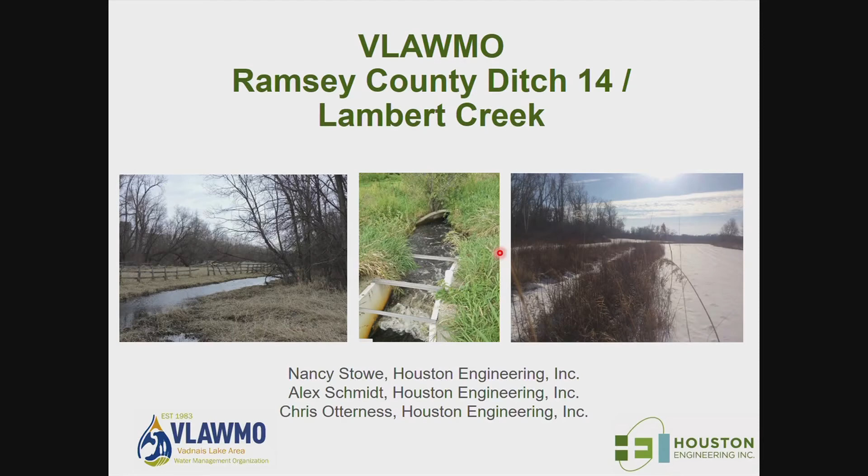We're here to present to you an overview of the methods and results of a project we've been working on with the staff of VLAWMO on Ramsey County Ditch 14 public drainage system, also known as Lambert Creek.

I'm Nancy Stowe. I'm a water resources engineer with Houston Engineering, and I served as project manager. Alex Schmidt, the tall one in white, is a project engineer. He did a lot of the heavy lifting on this project. And Chris Otterness, his role was an advisory role. He's also the district engineer for the Rice Creek Watershed District. So he kept us on the right track as far as the regulatory aspects of the public drainage system, and he'll briefly discuss that this evening.

So just a figure to get us oriented, showing where County Ditch 14 lies within the VLAWMO watershed, as well as its local subwatershed.

So what we're going to discuss this evening is we're going to provide you some information on the condition of County Ditch 14 with respect to its establishment, the regulatory environment, and its current condition. And then in the end, we're going to provide you with some management recommendations for the future.

So why is this important? County Ditch 14 was constructed over a century ago, and it was, of course, originally designed to serve agriculture. But as any aging system, it's very likely that its capacity has decreased due to sediment accumulation, trees falling, maybe channel banks falling in, reducing the capacity.

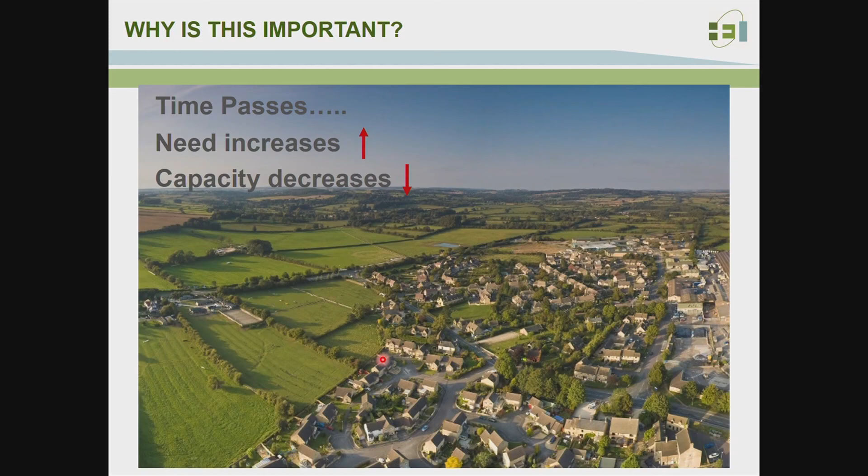So it was actually a really good idea to evaluate the capacity and the demands on the ditch - look at the current ditch depths as well as the capacity and peak discharges going through it nowadays, as well as the high water levels. And this information then will lead to identification of problems to solve.

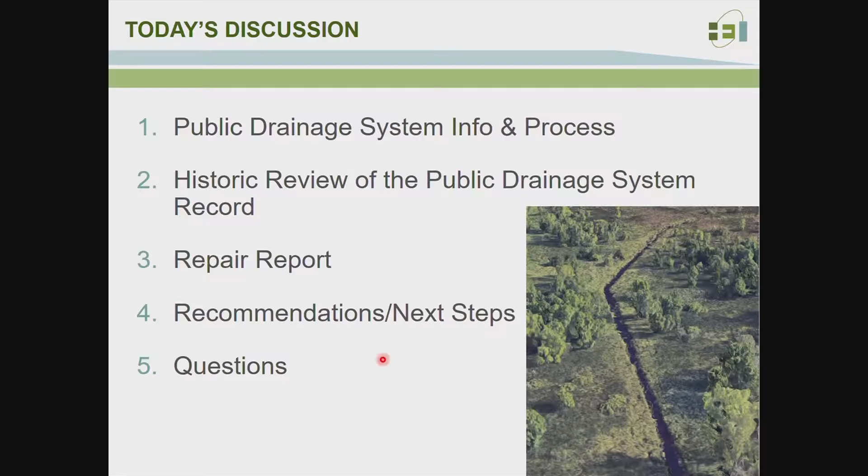So today's discussion, this is a brief outline. Chris is going to first come up and share some information on public drainage systems and processes. Alex will then share what he discovered through a historical review as well as results of survey data collected along with the staff of VLAWMO. And then we'll share the results presented in a repair report that we submitted to the district, or to VLAWMO, and provide some recommendations and next steps, finishing up with questions and discussion.

So right now I'm going to exchange places with Chris.

So I'm going to talk a little bit about what exactly a public drainage system is. And really when I'm talking about that, I'm talking about these agricultural systems. Most of them were constructed back at the turn of the 20th century. Some of them were even before that, late 19th century. A lot of the local drainage systems around Anoka and Ramsey counties were constructed back then.

But these are systems that are located all across the state. Most of them are still in existence, still being utilized for various different purposes. But the original purpose for these systems was to be able to drain agricultural lands.

And one side purpose for that, stated in numerous documents from 100 years ago, was the idea of actually doing this work to drain wetlands in order to decrease the mosquito population. That was one of these side reasons that they used them for back then.

Of course, these reasons for having the drainage systems can change over the years, but all these systems are subject to a Minnesota state statute called 103E. This statute has been in some form for over 100 years, and it's the mechanism they originally used to establish these drainage systems.

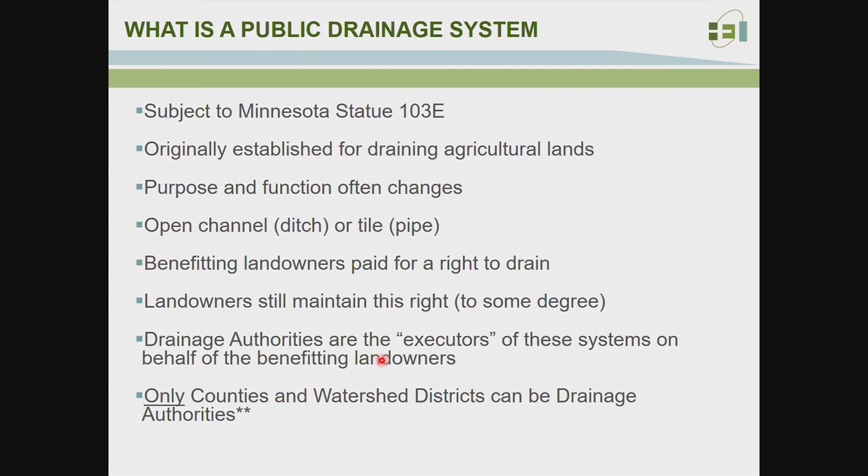But they still act as the original drainage authority does, as an executive of the system on behalf of the benefiting landowners. Those people who paid for it originally are the ones who receive the benefit, and the drainage authority is responsible for acting on their behalf and in their interest when wearing their drainage authority hat when making decisions regarding these systems.

So I'm talking a little bit about VLAWMO and their role in the system. Again, they were transferred authority of the county ditch back in 1986, so it's been a number of years now. There aren't many of these drainage systems that have been transferred to a water management organization like VLAWMO.

In fact, they might be one of the only ones in the state that I'm aware of that was transferred to this authority. It was transferred under state statute 103E, section 812, which says that after the transfer of a drainage system, to any sort of municipal Water Management Authority, the drainage system ceases to be subject to regulation under that chapter, meaning statute 103E. So the authority now is under a different state statute, 103B.

However, it's still a good practice, and in some cases a necessary practice, to follow the original state statute for public drainage systems. There's a few reasons for that. One, the nature of the system, even though it's providing a different purpose now, not agricultural drainage but more of a municipal outlet, it's still a ditch, meaning it's still going to function in a similar manner. It's going to have similar issues with regard to maintaining the system and being able to have water flow the way it needs to.

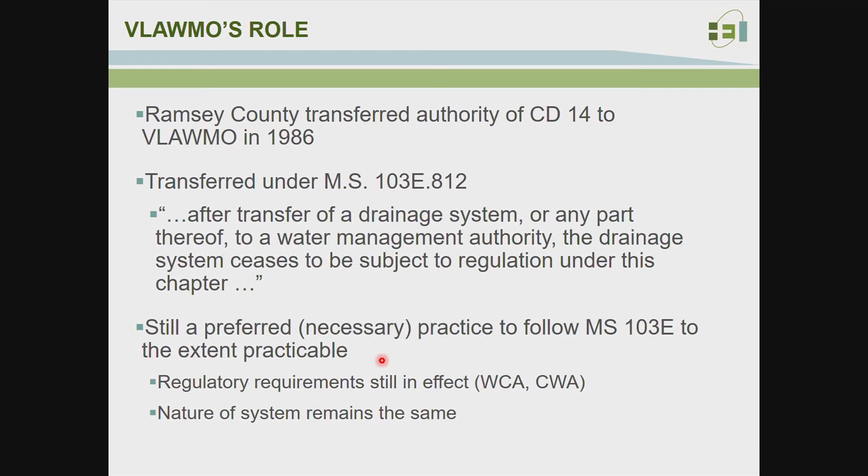So I'm going to talk a little bit now about why you even maintain the system. You have this old ditch that's sitting out here, again, 100 years old. Why does it even need to be there?

Well, for one thing, it's now serving as an outlet for a whole other land use out there, the municipal land use, and it's really serving as a stormwater outlet. If that isn't there, it's going to create issues because of the infrastructure that's been built out on the landscape, including some dams that are out there, culverts, roadways, even people's houses, dependent on having that infrastructure there to be able to get the water out.

If that wasn't in there, you'd have water flowing in different directions. You might not have any sort of predictable amount of how much water is going to be coming through the landscape. And that's a key word, having that predictable drainage.

Everybody that's a landowner adjacent to the system is going to want to know how it operates, so it isn't bouncing up 3-4 feet and flooding your house out under certain rainfall events. And we don't want how the system and the water levels occur on the system to change drastically based upon a condition that's changing with regard to the system.

And that's why it's important to be able to maintain these systems and provide that predictable drainage. And it does fulfill a responsibility that is required under Minnesota law.

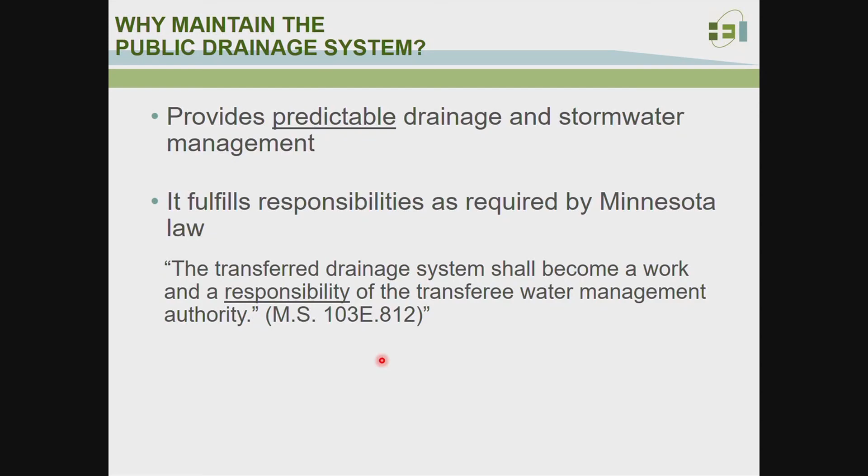It all starts with knowing what kind of records you have in the system, because that actually helps set bounds for not only what you have the authority to do, including what kind of regulatory engagement you need to utilize, but what kind of duties and responsibilities you have with the system.

And so again, as I mentioned before, even though these records are over 100 years old that initially created the system, they're still valid yet today, and they're still important to know with regard to how you're going to manage the system. Next thing you've got to do is be able to do inspection, be able to prepare reports.

That's one thing we'll be talking about, our repair report for the system, determining what the condition is and how it might be fixed. The third item that's always important is who's going to pay for the project, and that's another step required in the process.

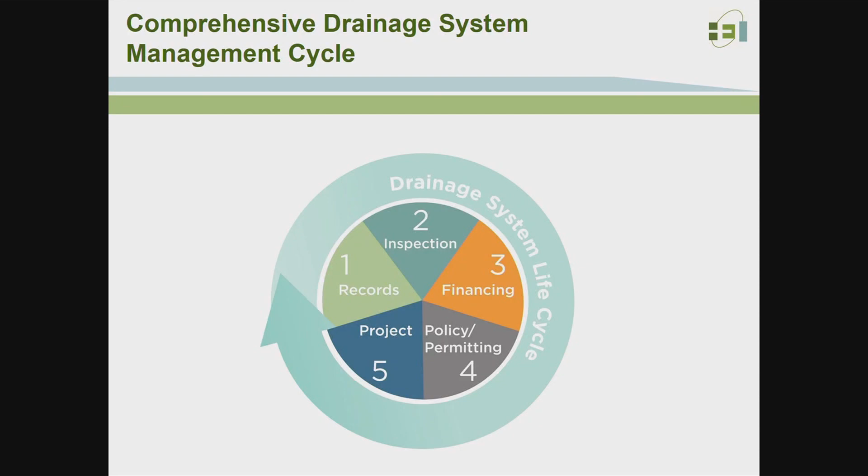It requires certain deliberation of what kind of policy you're going to have with the system and what kind of regulatory process you're going to be going into. And then finally, once you've gotten all those things done, then you can begin your project. But you can't start going out and doing work on a project without getting those other four items in a row, so you know what you're dealing with.

So I'm going to talk a little bit about some terms that you'll be hearing Alex and Nancy talking about in a bit. Just for clarity, when we're talking about maintenance and repair, sometimes we use these synonymously. Basically, we mean fixing the system, which could include cleaning out the ditch by excavation, creating a corridor to access the system, or replacing culverts.

Those are generally things done to keep the system functioning as originally designed, or some function it's provided since then. If we're talking about the word improvement, that's a touchy word because it's used a lot in state statute. It means making the system actually bigger, deeper, or steeper than it was when originally designed. Using the word improvement gets you into a whole different regulatory category, both with state and federal laws.

One of the other terms you hear a lot is 'as constructed and subsequently improved condition.' What that means is that there are certain lawful things that occurred from when they originally ordered the project and construction of the drainage system 100 years ago, plus any improvements that occurred along the way. There actually was one improvement that Alex and Nancy will talk about. Those things establish the baseline for where you might be able to excavate to, or the level of maintenance you can provide without getting into a different regulatory environment with different restrictions. It's very important to know that now, because you don't want to get out there digging and then find out you've gone too far and you're in trouble with the regulating authorities.

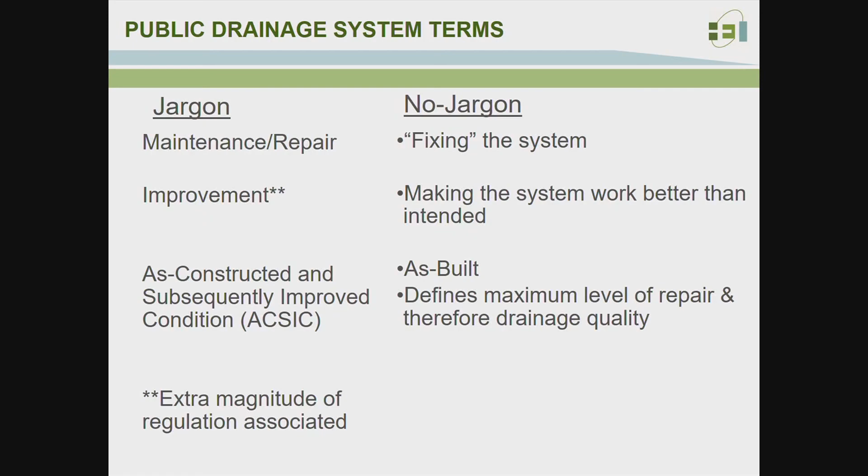So with that, I'll turn it over to Alex. He could start talking a little bit about these records that I mentioned and how we're utilizing and evaluating them.

Thanks, Chris. So what did we actually do in our project? We'll start off with the historical review. The purpose of it is to reestablish the public drainage system record. We wanted to look at how this system was originally established using these historic documents, and then review any changes or modifications that have been made to the system, which leads you to what the system is today.

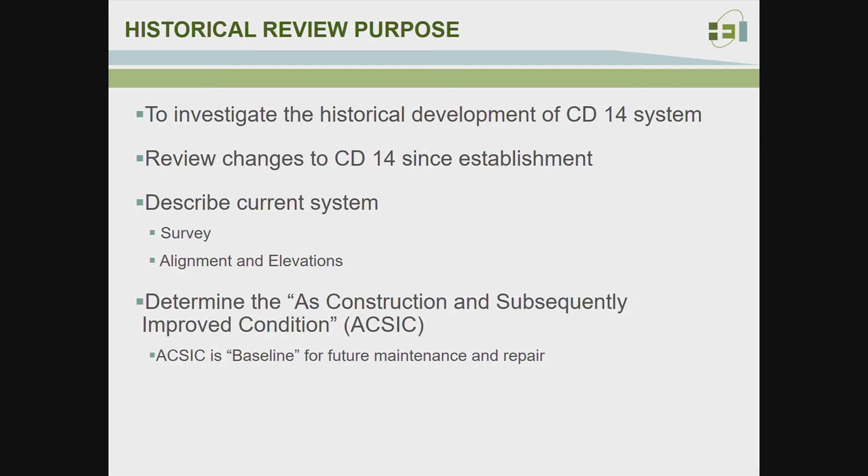We go out there with the survey crew and determine the alignment and the profile, or elevation, of the system along the ditch. Finally, the key of it is determining the as constructed, subsequently improved condition, which we'll talk about more. Chris just mentioned it, but it's the baseline for future maintenance or repair.

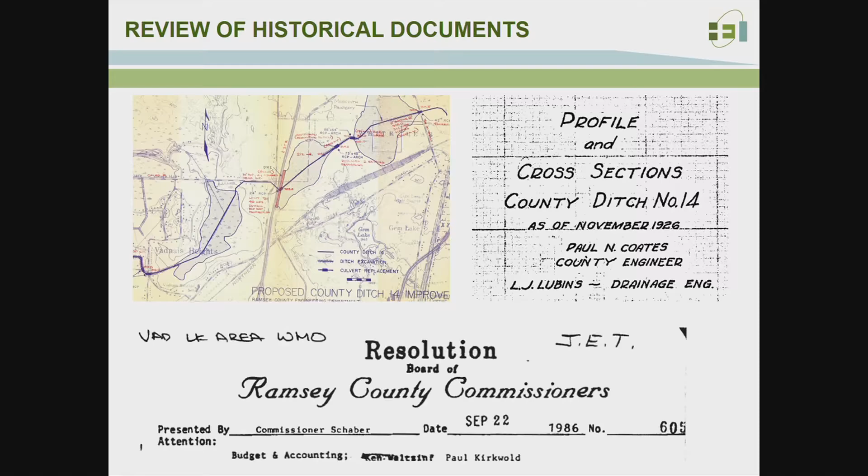Here's just a snapshot of some of the documents we found. They date all the way back to 1916, which was when the ditch was established. You may think, well, how do these old plans still have any impact today? They are all still relevant in the regulatory and management world of public drainage systems, as Chris was talking about.

So the history of CD14 — I said it was established in 1916, and then we have a document from 1926 that shows the actual profile and elevations of the ditch, along with some other culverts that were originally installed. That was a key document in determining the as constructed, subsequently improved condition.

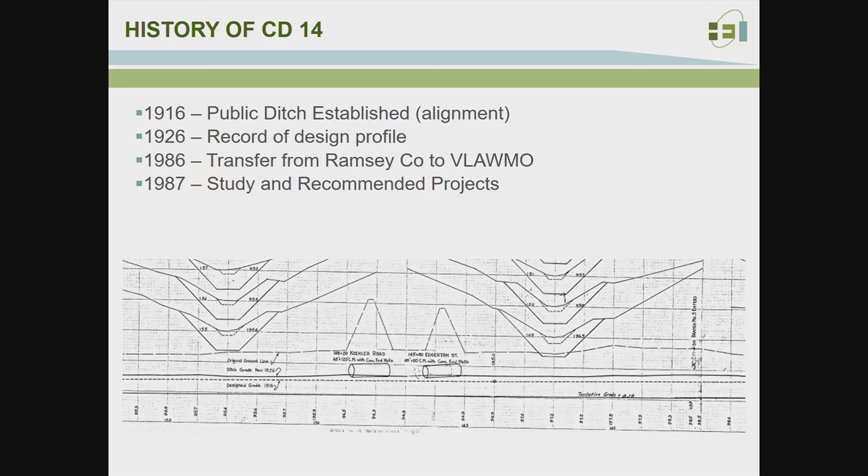In 1986, the system was transferred to VLAWMO from Ramsey County. 1987 was a milestone project engineering report that recommended a lot of the weirs that we see on the system today. Of course, there were a lot of other major modifications to the system with all the development occurring around it. I'm just showing a few here.

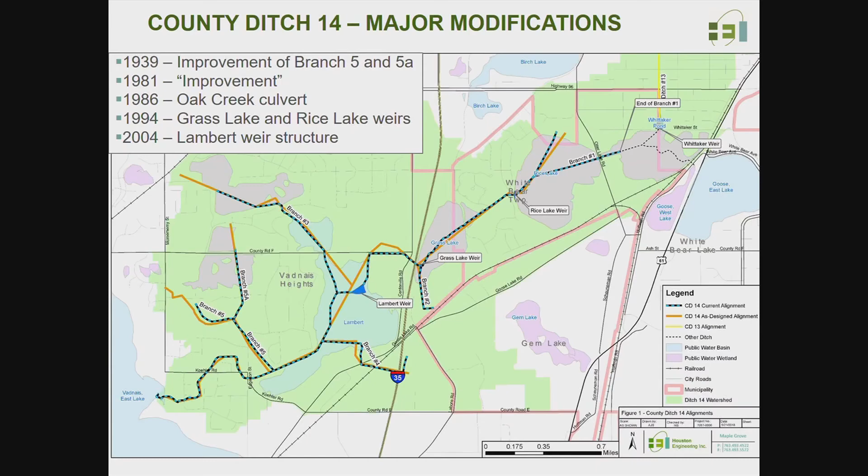To step back a bit, the CD14 system, also known as Lambert Creek in many of its locations, is located in Ramsey County, in the city of Vadnais Heights, White Bear Township, and White Bear Lake. It consists of the main trunk heading down the middle of the map, as well as 5 branches spoking out the sides of the main trunk. We reviewed these documents, determined modifications to the system, and you can see in orange on this map the ditch as originally constructed. From our survey, you can see in the blue-black dashed line where the system and the ditch stand today.

Here's just some photos of HEI staff and VLAWMO staff. Brian and Tyler were instrumental in chipping through much thick ice to get all of our survey shots. They also educated us on the system as we went through and showed us the details of the ins and outs of the ditch.

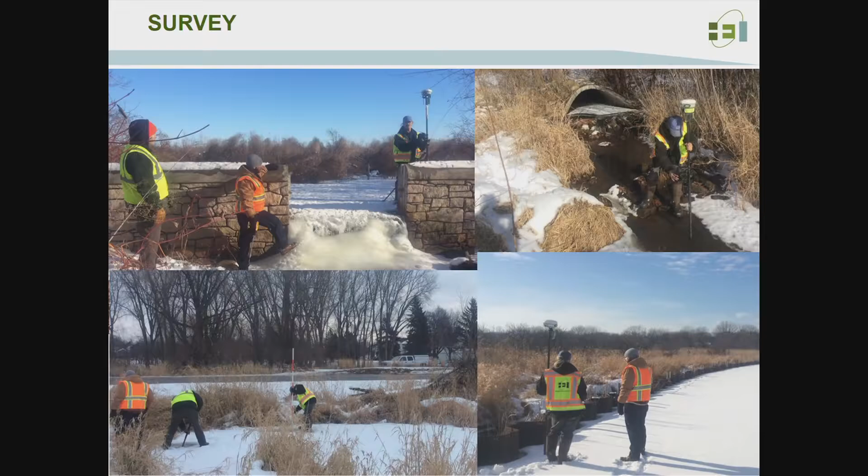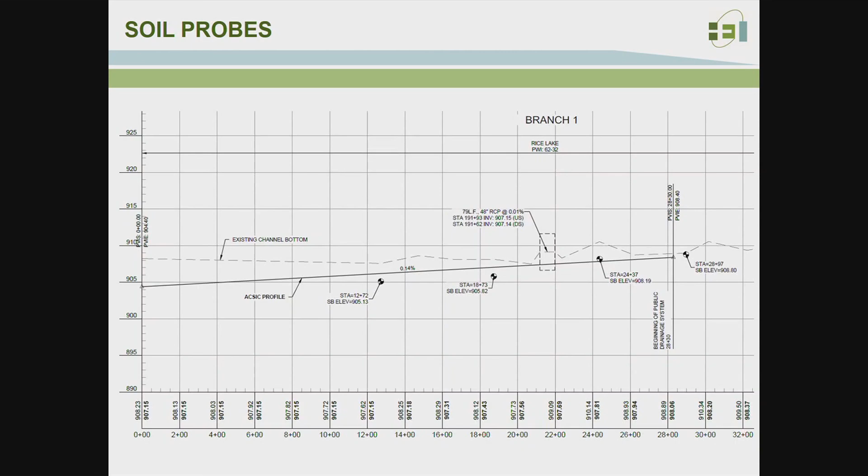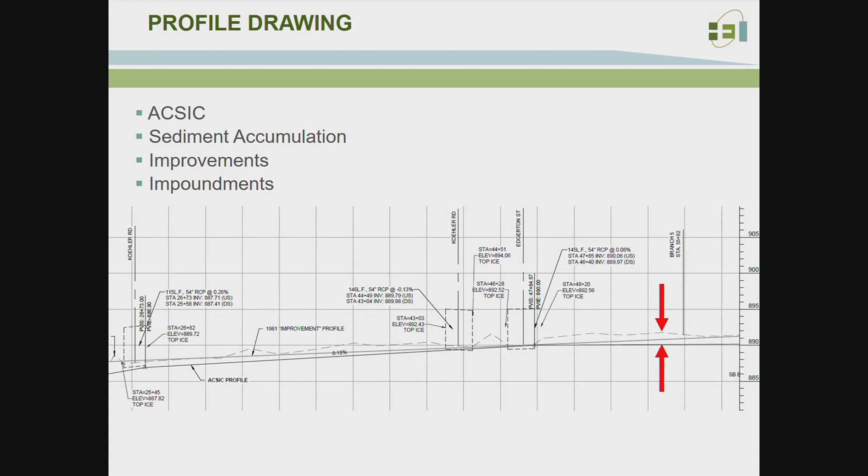One other thing I'll mention about these profile drawings: we use them to look at the system in more detail. We can see any improvements that have been made on the system by comparing old documents, any impoundments made on the system—that would be a lot of the weirs along this—as well as, shown in red, any accumulated sediment through the ditch. Nancy will be hitting on that more in the repair report.

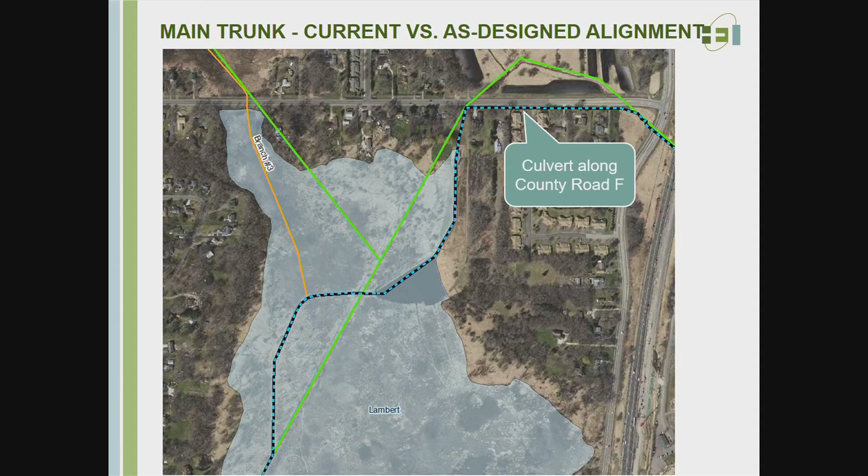I just want to give you a couple examples of some of these alignment changes we've seen. First, here is a culvert. In green you'll see the as-designed alignment, and in blue-black is the current alignment. A culvert along County Road F was installed, I think, in the 70s or maybe the 80s. You can see the alignment change from the original as-designed alignment, and also more recently the Lambert Weir project realigned the ditch.

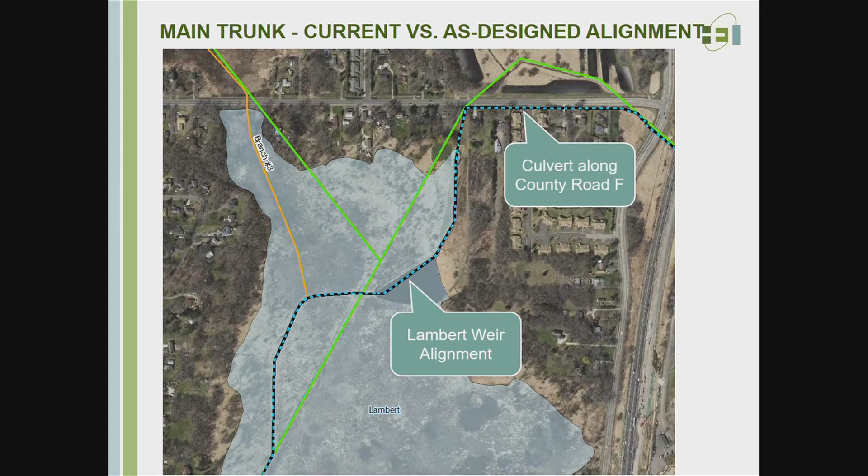Another interesting thing we found: branch 1, shown in orange here, was originally thought to be the main trunk, which sort of made sense as a lot of the water flows through this ditch. This is on the very upstream end of the system. It was found that in the original documents, this portion of the ditch was called branch 1, not the main trunk. So we've corrected the system to say the main trunk is actually this portion going north here in Rice Lake.

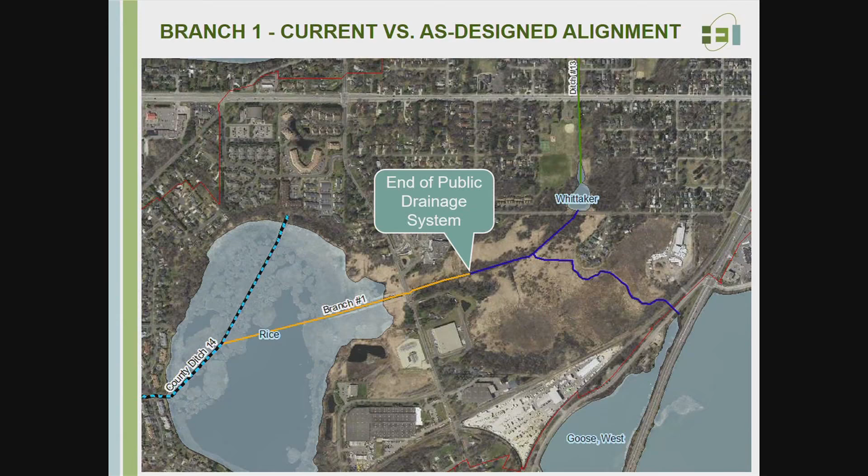Last part of the historical review was just identifying problem areas we found along the system. First, there's high water concerns along Pennington Place that we were very cognizant of as we surveyed and did the report, and Nancy will get more into that. This picture shown here is Lambert Weir.

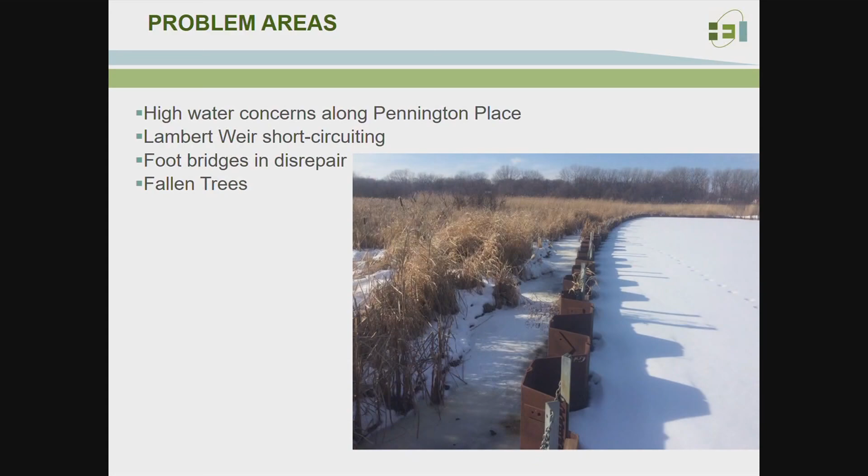Lambert Weir was designed to treat water by dispersing it through the wetland. That is sort of defunct now, and it's short-circuiting along this ditch here, along the sheet pile weir, not dispersing through the wetland for any water quality benefit.

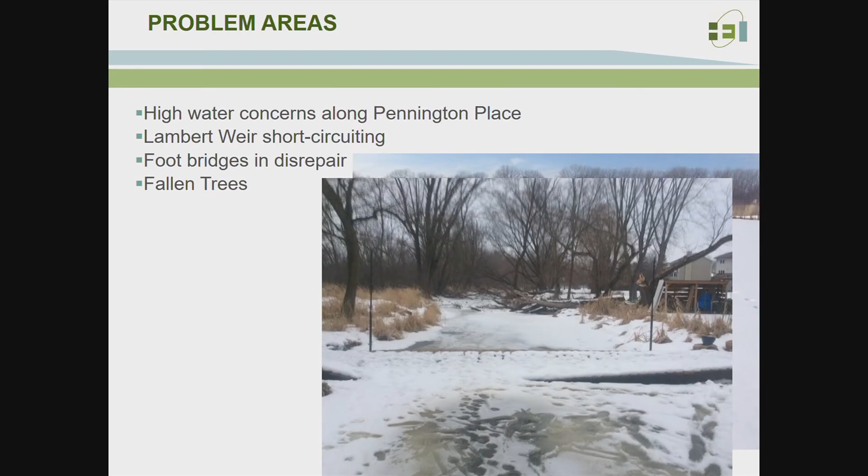Second, there are many footbridges along the system, some of which are in disrepair, so they could block or impede the flow of the water. Finally, there were a couple locations with fallen trees also in the conveyance path of the system that could block water from flowing downstream. I believe some of this may have been maintained already.

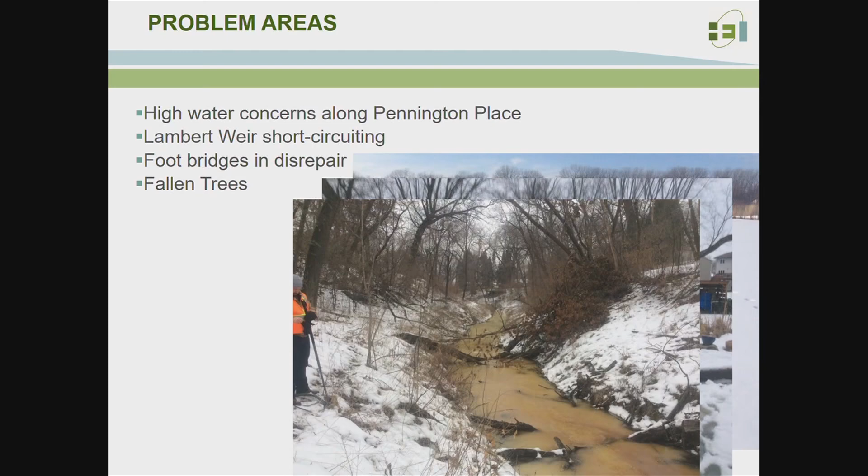So with that, I'll invite Nancy back up to talk about repair and recommendations.

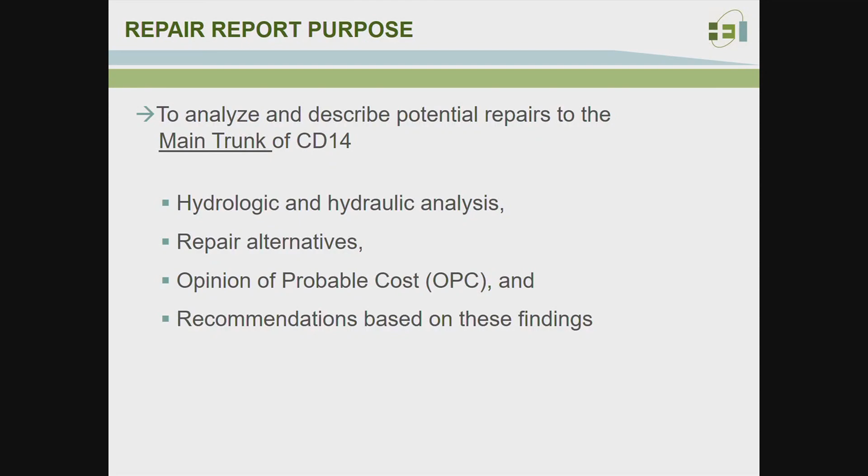And the purpose of that report is to identify the problem areas and describe potential repairs. And we did this along the main trunk of CD14. And what that all includes is first of all, a hydrologic and hydraulic evaluation of the system, and that's to identify problems that maybe aren't seen while they're out there inspecting and doing the survey. Then analysis of the possible repair alternatives, for which we then develop cost estimates and then recommendations based on these findings.

So starting with the hydrologic and hydraulic analysis, what we do there is we will take all of the geometry data that we got during the survey, and we're going to build a computer simulation model. We can do it with various models. We use a proprietary software called XP SWMM. And we build this computer model, and it simulates the existing conditions. And then we can find out where are extreme high water, areas that may be encroaching buildings, any other problems.

And once that's established and simulates the existing conditions, we identify problem areas, we can stick in repair. Let's say you want to replace a culvert. We can put a culvert in there, and then we can see how everything changes. That's why we build these models.

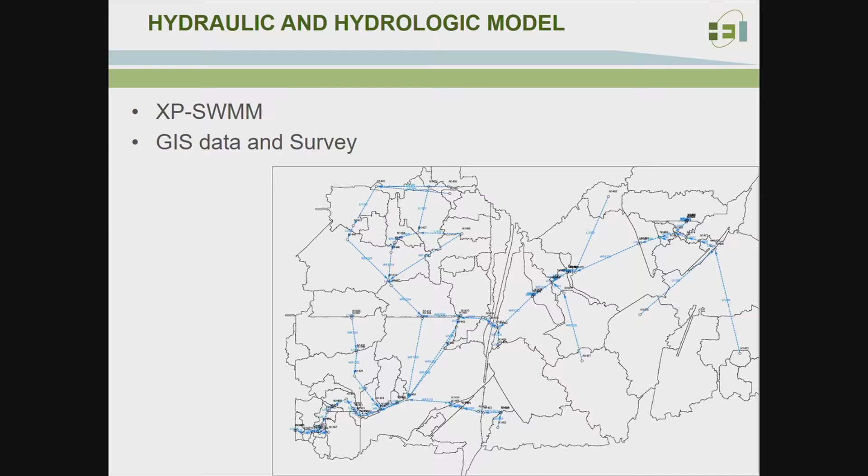Anyway, so model results. One unique aspect of the CD14 system is that much of it is actually controlled by engineered weir structures. I can't see this very well, but we have the Rice Lake weir, the Grass Lake, and the Lambert weirs. And they kind of control the elevations upstream a lot. And luckily, no homes were found at risk upstream of these weirs, and actually no homes were found throughout the entire main trunk system that are at risk of being flooded in the 100-year event.

And when I say 100-year event, I mean that rainfall event which has a 1% chance of occurring in any given year. And that's simulated with 7.3 inches of rainfall within 24 hours. Although we did find one garage up in this area around Branch 3, just south of County Road F, that is at high risk of inundation in that 100-year event. That's the only structure that we found.

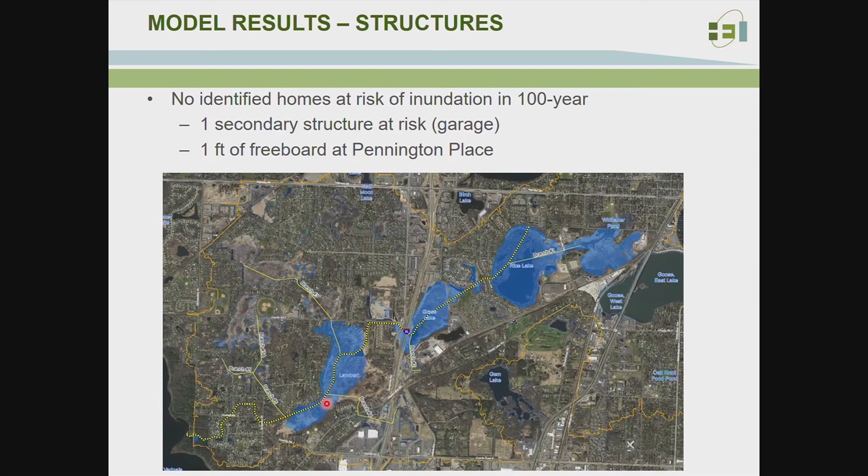So we also simulated the 2-year event, which is often considered a benchmark for frequent rainfalls. That is the event that has a 50% chance of occurring in any particular year, and we simulate that with 2.8 inches of rainfall in 24 hours. And what that did was confirm that there is a definite encroachment of the floodplain into the yards at Pennington Place. So that's what we did with the 2-year.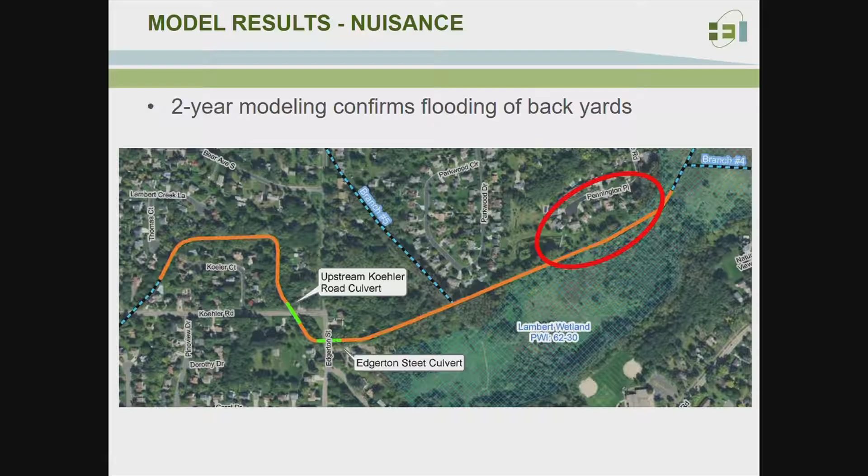And I just want to note, though, we simulate that in the computer model, we also assume that the ditch has drained between rainfall events. In reality, what the residents could be experiencing is that if the downstream ditch is not draining properly, it may not have receded completely before the next rainfall event comes along, right? So let's say the ditch in reality is starting a little bit higher, the next rainfall comes, so that high water level at times could be higher, and that could compound itself throughout the season.

So then, once we identified a potential problem in this area, we begin to look for the potential causes. So we look downstream of Pennington Place. And what Alex and Brian and Tyler found is downstream about this location, north of Koehler Road, they noticed trees within this channel, which could be affecting the drainage.

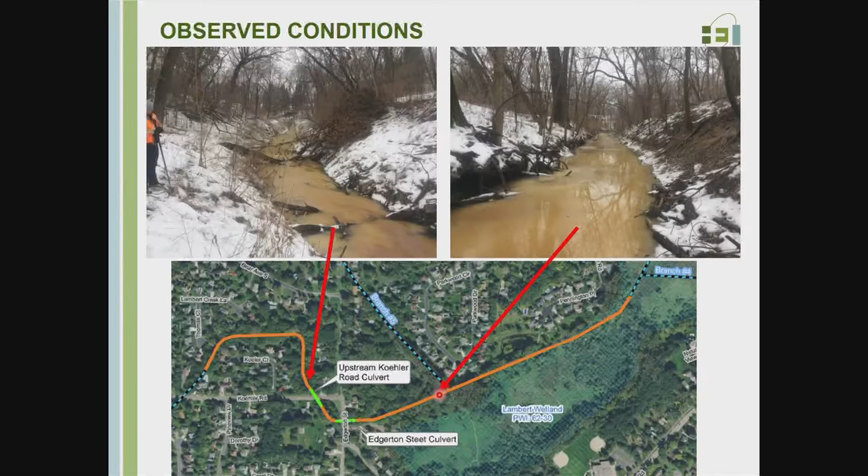And they also found in this area some undercutting and bank erosion just downstream of the confluence with Branch 5, which could potentially cause sediment to build up at the bottom of the ditch. And indeed, if you look at the drawings that we made here, you can see that there is 1 to 2 feet of sediment buildup in both of those locations. So it definitely could be a cause of our issues.

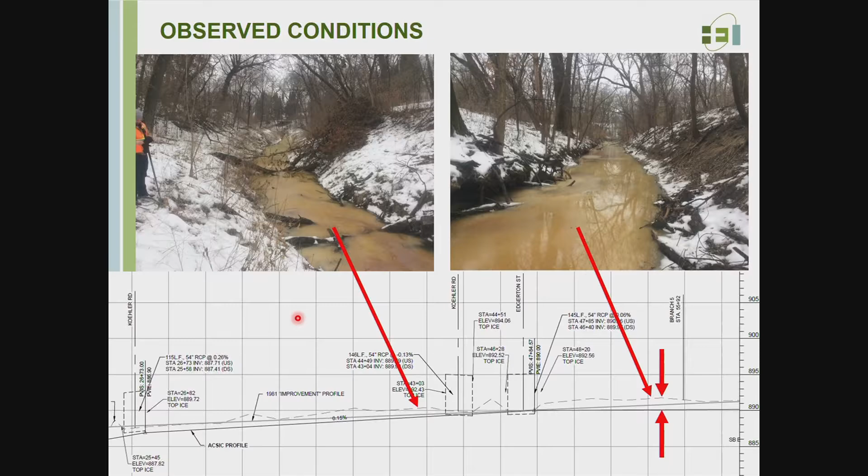So before we actually jump into what repair alternatives we're going to select, we need to step back and make sure that we actually figure out what problems we're trying to solve.

And I just want to review again what we did. We first always start with looking at structures and structures at risk of inundation in the 100-year event. We found that this is not a problem throughout the system. We found 1 garage that is prone to flooding. But we also found that there are no repairs that we would be able to carry out that would actually improve that so that it would be completely free of that risk.

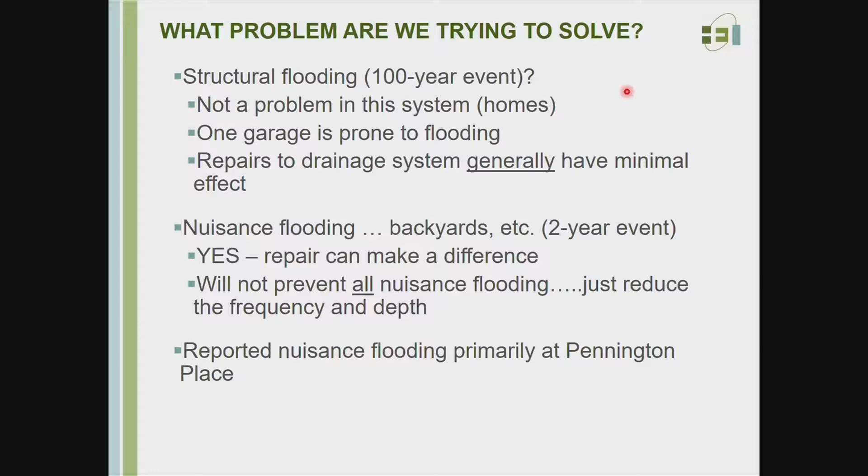Then we also looked at nuisance flooding, and that's backyard flooding in a 2-year event. And yes, there are repairs that could make a difference and help that situation. It won't prevent all nuisance flooding if we're staying with a repair and not moving to an improvement. You can help the nuisance flooding. It's not going to remove it completely. And again, I guess we confirmed that nuisance flooding that's been reported by residents in that area.

So we came up with 2 alternatives. Alternative 1 consists of removing the accumulated sediment for about 4,300 feet of ditch, starting here just upstream of Pennington Place where the sediment starts to build up significantly, all the way down through Edgerton and Koehler Road, and down to this point at the end of the orange line. So this would basically include lowering the flow line of the ditch to the as constructed and subsequently improved condition.

So this would actually reduce the 2-year single event flooding by at least 0.15 feet. And the reason I say that is the existing conditions analysis assumes water is starting at the bottom of the ditch, right? What this will also do is it'll help the ditch drain all the water that's been accumulated between storm events, so that the next time a rainfall comes, it's going to start fresh and the ditch will be drained down to its normal water flow.

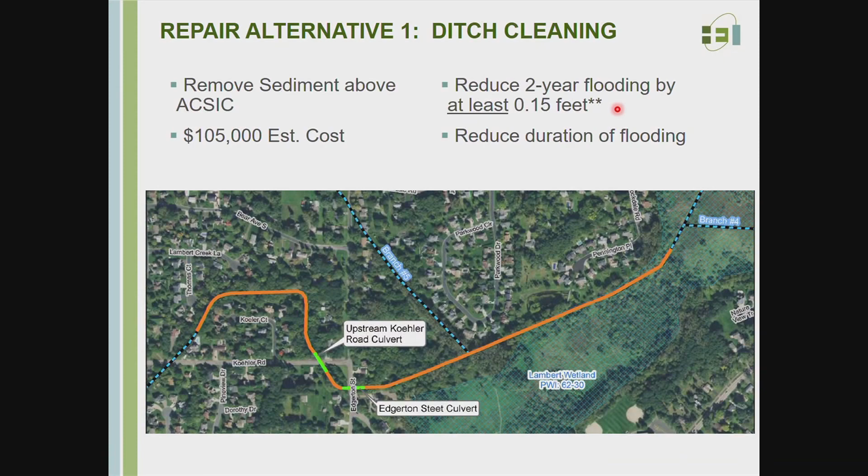Alternative 2 takes it a step further. It still has a ditch cleaning for this 4,300 feet, but it also replaces the 54-inch culverts at Edgerton and Koehler with 60-inch. This is a much more expensive endeavor. It is $352,000 as opposed to the $105,000 for alternative 1. It will reduce the 100-year by 0.28 feet, but it still doesn't take that 1 garage out of the floodplain.

No, so that .28 is the difference between the existing conditions high water level and the proposed conditions high water level. So that would be different, right? So in the second repair, when we also increase the size of the culverts, we increase the flow capacity more, then the high water levels upstream will go down more. Okay.

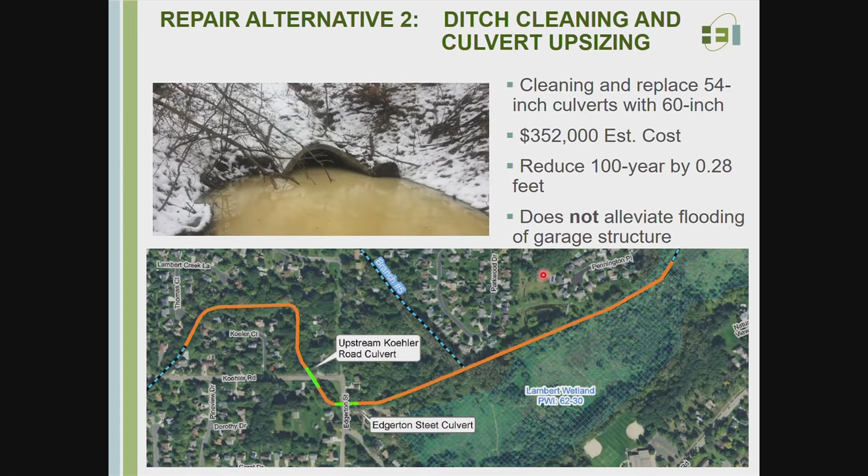I'm going to move on to the recommendations. So we had those two alternatives. Repair alternative 1 does address the nuisance flooding by decreasing the depth, duration, and extent of the flooding. However, even though alternative 2 does reduce the flooding quite a bit, the difference in cost of $247,000 is a lot. And so we probably wouldn't recommend immediate action on alternative 2 right now.

And we're recommending that the board consider looking at alternative 1 because it is to address nuisance flooding as opposed to structures flooding. There's no urgency to safety right now, but we do recommend that they look at that and consider it potentially for the next couple of years in their budgeting. And we also recommend that they start talking to contractors. That area is going to be very difficult to access. There's some real deep areas.

And so to start talking about the feasibility of how that could be done, to start talking to landowners and let them know that the ditch is there, that a repair of the ditch may impact trees, and may impact some parts of their property if they need it for access. And I think I'm going to leave it there.

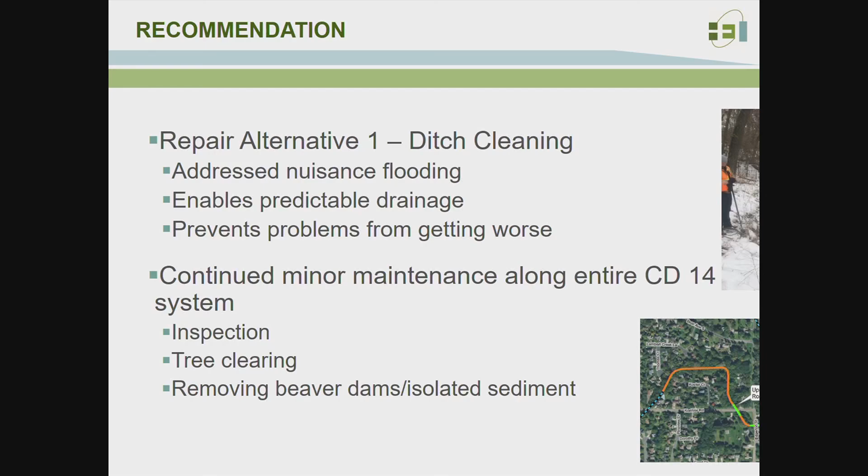And so I'm going to go back to Chris's original drainage system cycle. And so what we've completed so far is the records. We've included this inspection, which includes the repair report. And the next step will also be looking at financing. So if the board decides to move forward at any point, the next step will be getting a cost estimate a little bit more refined after going out for bids with contractors.

And then working on any permits if we have to deal with the DNR, and eventually construction of the project. So again, if they do consider ordering the repair: budget for the project, develop a scheduled timeline, regulatory engagement with landowners, develop project plans, and construct the project. I got it. Okay.